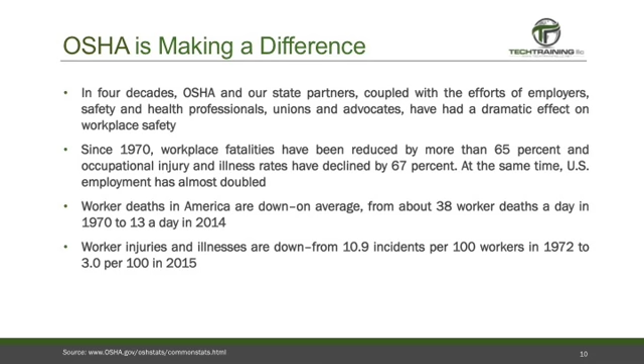Worker deaths in America are down on average from about 38 workers per day in 1970 to 13 per day in the year 2014, and worker injury and illnesses are down from 10.9 incidents per 100 workers in 1972 to 3 per 100 in the year 2015. These numbers are positive, but they're nothing to brag about. One death, one injury, one illness is far too many.

So who is covered by OSHA? Most employees in the United States come under OSHA's jurisdiction. OSHA covers private sector employees and employees in all 50 states and the District of Columbia, and other U.S. jurisdiction territories, directly through the federal OSHA program or through an OSHA-approved state program. State-run health and safety programs must be at least as effective as the federal OSHA program to qualify.

Now, employees who work for state and local governments are not covered by federal OSHA, but do have Occupational Safety and Health Act protection if they work in a state that has an OSHA-approved state program. 4 additional states and 1 U.S. territory have OSHA-approved programs that cover public sector employees only. This includes Connecticut, Illinois, New Jersey, New York, and the Virgin Islands. Private sector workers in these 4 states and the Virgin Islands are covered by federal OSHA.

And federal agencies must have a safety and health program that meets the same standards as private employers. Although OSHA does not fine federal agencies, it does monitor federal agencies and responds to workers' complaints. The United States Postal Service is covered by OSHA. And now is a good time to mention the General Duty Clause. The General Duty Clause is written into the Occupational Safety and Health Act.

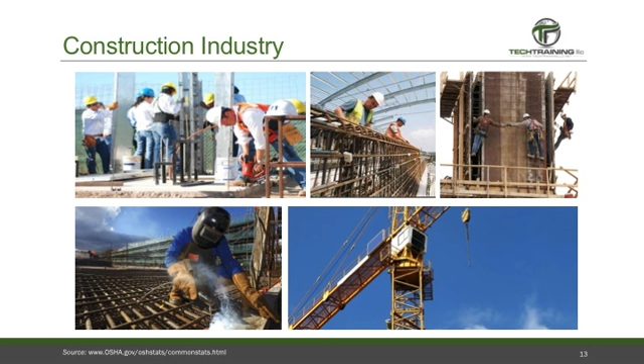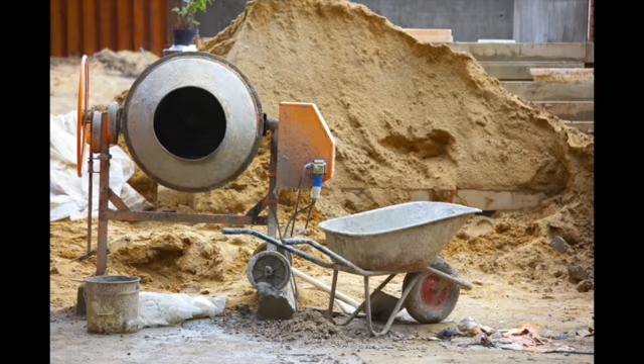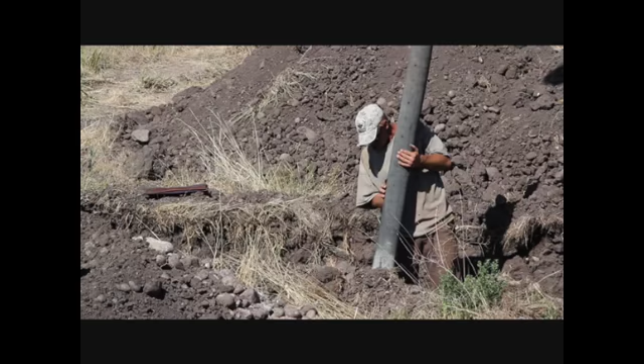Construction is a high-hazard industry that comprises a wide range of activities. It may involve demolition, alterations, renovations, and repair. Most people in this industry are in the industry because they have a passion for it. They're professionals and understand the hazards that they face every day. Many of those hazards they can see. They understand the potential for falls, the potential of unguarded equipment or being struck by heavy construction equipment. Unfortunately, many of those hazards are not visible, such things as silica dust or asbestos.

The information and the resources provided in this presentation are hopefully going to assist those in this industry, whether they be workers or employers, to identify and reduce and hopefully eliminate construction-related hazards. And there is no better place to start than with the construction industry's Fatal Four. Of the 4,386 worker fatalities in private industry in the calendar year of 2014, 899 or 20.5% were in construction. The Fatal Four were responsible for more than half, or 60.6%, of the construction worker deaths in the calendar year of 2014.

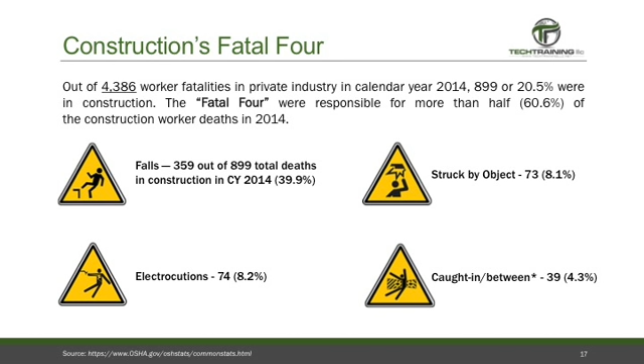And number one on the Fatal Four list, falls. 359 of the 899 total deaths in the calendar year 2014 were caused by falls. That's 359 of our fellow workers perished from this one hazard. Next up, electrocutions. 74 people killed by electrocutions. After that, struck by an object, 73 people. And last, caught in between, 39 fellow workers killed by this hazard. Just imagine if we could eliminate these 4 accidents. That would be 545 people returning home to their families at the end of every day, every year.

So now let's review what OSHA has found to be 2015's top 10 most frequently cited violations. Not surprisingly, number 1 is fall protection, obviously directly related to the Fatal Four. The C at the end of fall protection represents that this is a specific construction standard. Number 2, hazard communication, getting the message out. A big problem on the construction site and in the construction industry. Number 3, also a construction standard, scaffolding. Number 4, respiratory protection. This is especially important when we're talking about silica dust. Respiratory protection protects you from unseen hazards.

Number 5, lockout/tagout. Number 6, powered industrial trucks, obviously associated to being struck by, another one of the Fatal Four. Ladders, a construction standard. Also, electrical wiring. Number 9, machine guarding. And number 10, electrical. Here we're talking about general electrical requirements.

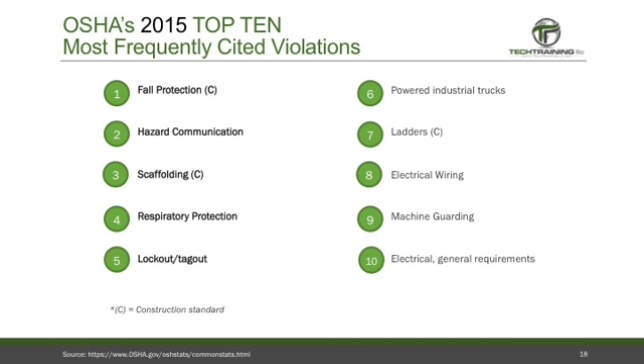Now we've already discussed that OSHA is the law, but let's take a look at the breakdown of these violations. And let's start with number 10, electrical. Again, general requirements. This is OSHA standard 1910.303. Total violations for the fiscal year 2015 was 2,181. Some of the top sections that were cited was installation and use of equipment. Also, not surprisingly, the space around electrical equipment. This can be identified as a hazard on almost any job site that you visit. The previous year, the fiscal year 2014, the ranking for this violation was also number 10 with 2,427 cited violations.

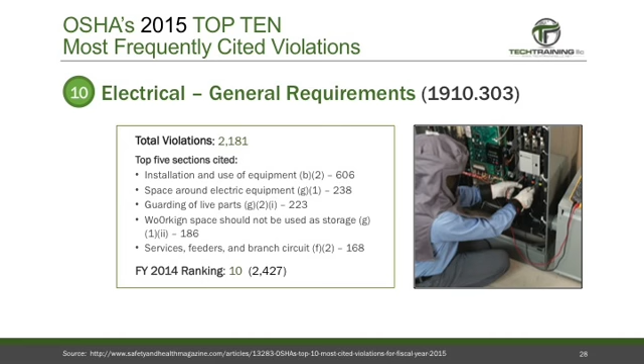Next up, number 9, machine guarding, OSHA standard 1910.212. Total violations for 2015 was 2,540. Not surprisingly, one of the top violations was types of guarding. It is highly recommended that you stick with manufacturer recommended guarding. If you question that guarding, you can always ask the manufacturer if this guarding is OSHA approved. If it is, then stick with that guarding and you can avoid this violation. This is the same ranking as 2014. It was number 9, and again, slightly more violations in 2015 than 2014, as 2014 had 2,520 violations.

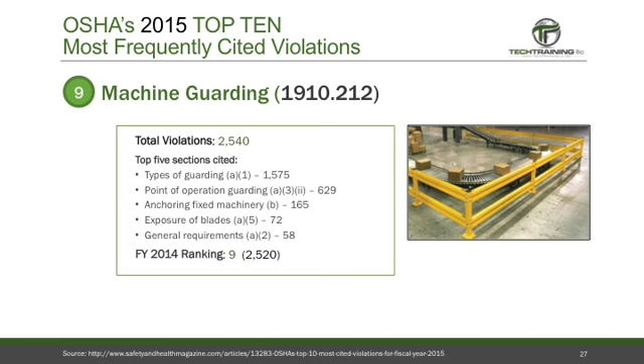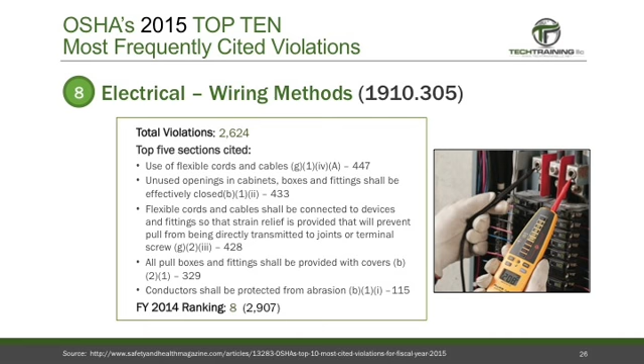Number 8, electrical again. This is wiring methods, 1910.305. Total violations for the year 2015 was 2,624. Of the top cited violations, use of flexible cords and cables. This is category G1-4A. 447 violations. This one is becoming more and more common as people are using incorrect types of cords and cables. Be sure to verify that you're using the correct cable. In fiscal year 2014, its ranking was also number 8, but it had 2,907 violations, so 2015 saw a decrease of almost 300 violations, an overall improvement in the year 2015.

Number 7, ladders. OSHA standard 1926.1053. Total violations for 2015, 2,732. And number 1 cited violation in this category, requirements for the ladder. This is accessing upper landing surfaces. This is a short climb, and what people do is they'll grab a pallet, they'll grab a plank, they'll grab something along those lines and use it as their ladder.

This was cited 1,866 times. The 2014 ranking for this category was number 7, so no change. But again, the positive side, a slight decrease. In 2014, there were 2,967 violations, again compared to the 2,732 of 2015.

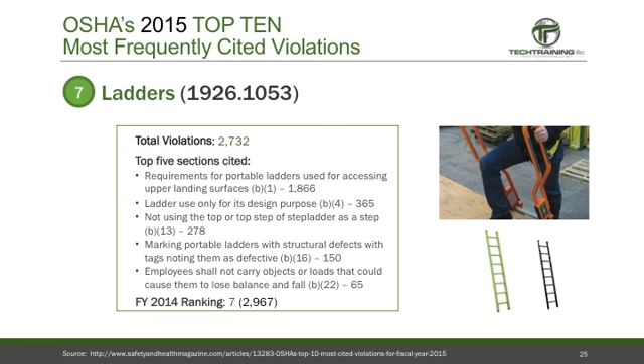Number 6, powered industrial trucks, 1910.178. Total violations, 3,004. Over 3,000 violations, and the number 1 violation, ensuring competency of the powered industrial truck operator. Now you may recall that one of the fatal 4 was struck by, and here this violation was cited 544 times. Incompetent powered industrial truck operators cited in the year 2015. That's a scary number considering the fatal 4.

The 2014 ranking was number 5, so it's dropped back a bit. I suppose that's a positive sign, and the number of violations has dropped a bit from 3,147 in 2014. But again, these are directly related to the fatal 4 and have to be corrected.

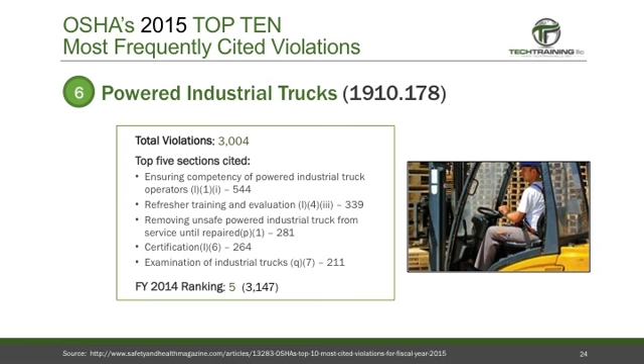Next, lockout tagout, 1910.147. This was number 5 on the 2015 list. This standard outlines minimum performance requirements for the control of hazardous energy during servicing and maintenance of machines and equipment. Total violations for the year 2015, 3,308. This is an increase from 2014, where there were 3,117 violations. Furthermore, this violation has moved up in the rankings, number 6 in 2014, moving in the wrong direction at number 5 for 2015.

Next is number 4, respiratory protection, standard 1910.134. This standard directs employers on how to establish and maintain a respiratory protection program. It lists requirements for program administration, worksite specific procedures, respirator selection, employee training, fit testing, medical evaluation, and respirator use. It also covers maintenance and repair of respirators.

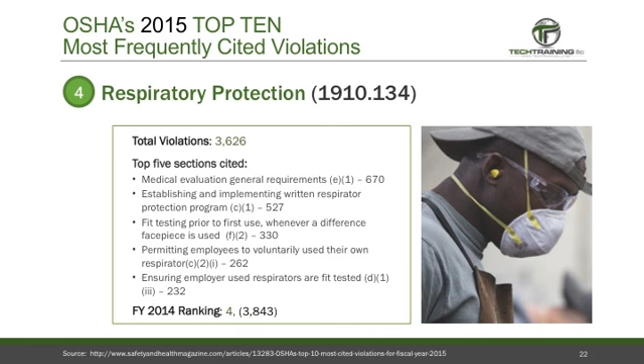OSHA cited this standard in the year 2015 3,626 times. This again is a slight decrease, a slight improvement over the year 2014, where it was cited 3,843 times.

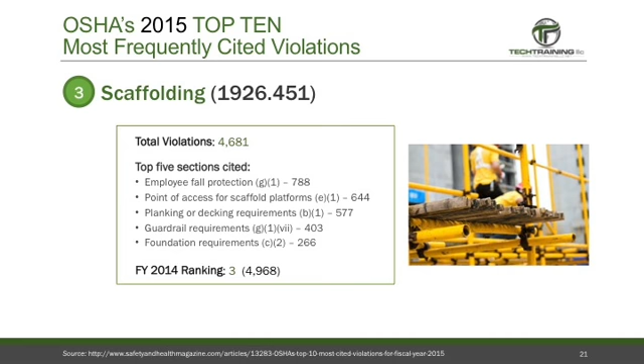Number 3, scaffolding, standard 1926.451. Total violations in 2015, 4,681. And take a look at the number 1 issue in this sector. It was employee fall protection, cited the most times at 788. And again, I want to remind you the number 1 in the fatal 4 was in fact falls. This is a slight improvement over 2014, where the ranking still remained number 3, but was cited 4,968 times.

Number 2 is hazard communications, 1910.1200. This standard addresses chemical hazards produced in the workplace and imported into the workplace. It also governs the communication of those hazards to workers. This particular violation was cited 5,681 times in the year 2015. Its ranking in 2014 was in fact number 2, when it was cited 6,148 times. Again, a slight improvement over 2014.

And number one cited in the year 2015 again was Fall Protection, 1926.501. This is also the number one in the fatal 4, falls. This standard outlines when fall protection is required, which systems are appropriate for given situations. It also covers the proper construction and the installation of the safety systems, and the proper supervision of employees to prevent falls. It is designed to protect employees on walking or working surfaces, horizontal or vertical, with an unprotected side or edge higher than just 6 feet.

According to OSHA's top 10 most frequently cited violations of 2015, again, this was the number one ranking, fall protection, cited 7,402 times, and unfortunately, it was also number one in 2014, being cited 7,516 times.

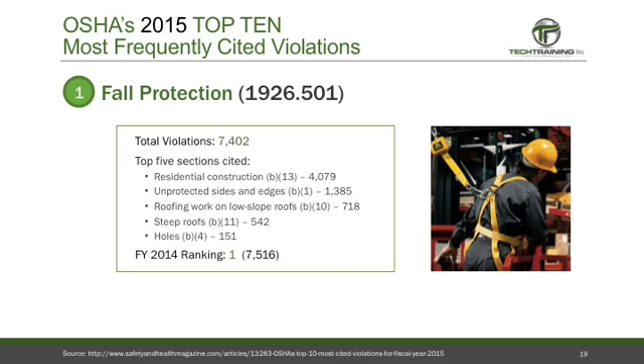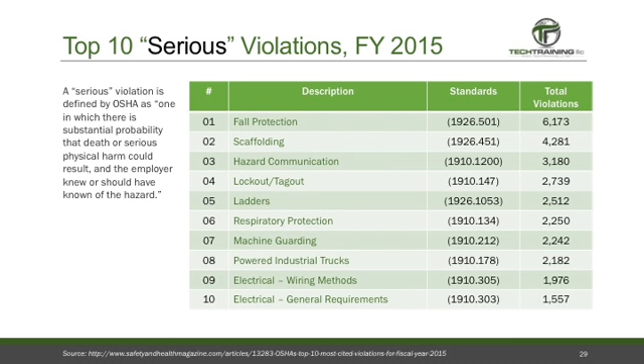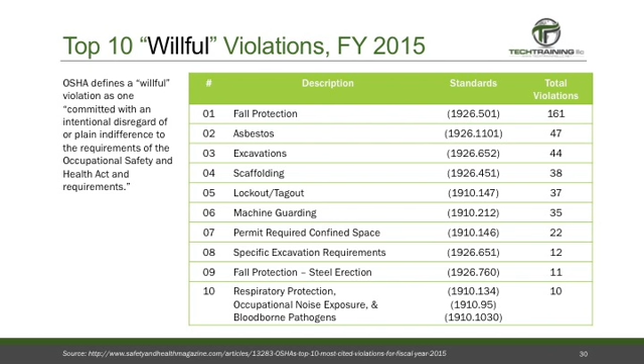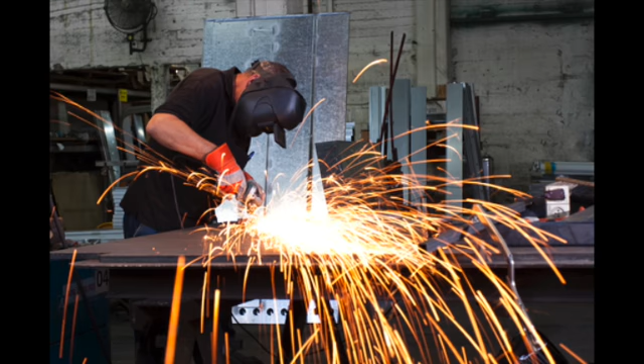Now here's a sad reality. Hazards exist on every construction site in many different forms. Sharp edges, falling objects, flying sparks, chemicals, noise, and a host of other potentially dangerous situations. OSHA requires that employers protect their employees from workplace hazards that can cause injury. Controlling a hazard at its source is the best way to protect the employees.

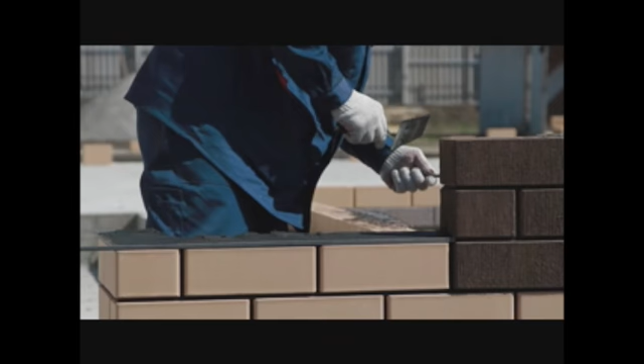Depending upon the situation and the workplace conditions, OSHA recommends the use of engineering or work practice controls to manage or eliminate hazards to the greatest extent possible. For example, building a barrier between the hazard and the employee is an example of an engineering control. Changing the way in which employees perform their work is a work practice control.

When engineering or work practice controls and administrative controls are not feasible or do not provide sufficient protection, employers must provide employees with personal protective equipment or PPE. Personal protective equipment is equipment worn to minimize the exposure to a variety of hazards. These injuries and illnesses may result from coming in contact with chemical, biological, physical, electrical, mechanical, or other workplace hazards.

Personal protective equipment may include items such as gloves, safety glasses, and safety shoes, earplugs or ear muffs, hard hats, respirators, coveralls, vests, and in some cases, full body suits. So what can be done to help ensure the proper use of personal protective equipment? Well, all personal protective equipment should be of safe design and construction, and should be maintained in a clean and reliable fashion. It should fit well and be comfortable to wear. This will encourage workers to use it.

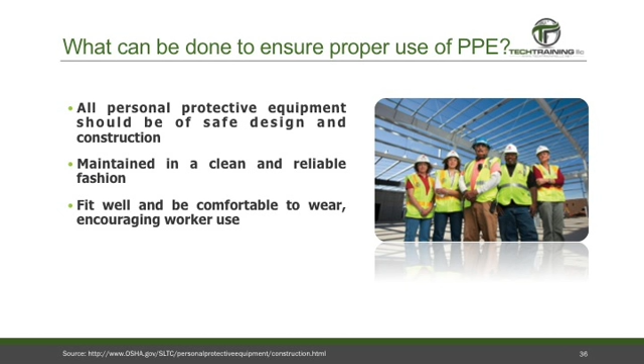Employers must also require and train each worker for the following. When is it necessary to wear personal protective equipment? What kind of PPE is required? The limitations of the PPE, the proper care, maintenance, and the useful life, as well as the disposal of the personal protective equipment. Now, whether you are an employee or an employer, you should be interested in some of the general safety and health provisions involved with personal protective equipment. This falls under

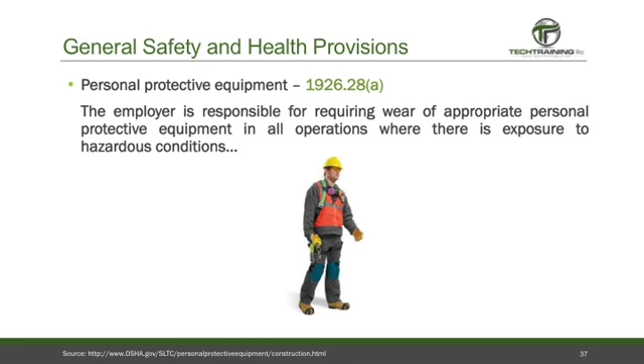1926.28. The employer is responsible for requiring wear of all appropriate personal protective equipment in operations where there is exposure to hazardous conditions. 1926.28(b). Regulations governing the use, selection, and maintenance of personal protective equipment and life-saving equipment are described under Subpart E of this section. 1926.95(a). Protective equipment including PPE for eyes, face, head, extremities, etc. shall be provided, used, and maintained in a sanitary and reliable condition.

Now we realize that some of these regulations are extremely dull, but this next one is important as we've seen many arguments erupt between workers and supervisors on various construction sites. And it is related to employee-owned personal protective equipment, and it is in OSHA under 1926.95 Part B. And it states, where employees provide their own personal protective equipment, the employer shall be responsible to assure its adequacy, including proper maintenance and sanitation of such equipment. 1926.95 Part C is design, and design states that all personal protective equipment shall be of safe design and construction for the work which is to be performed.

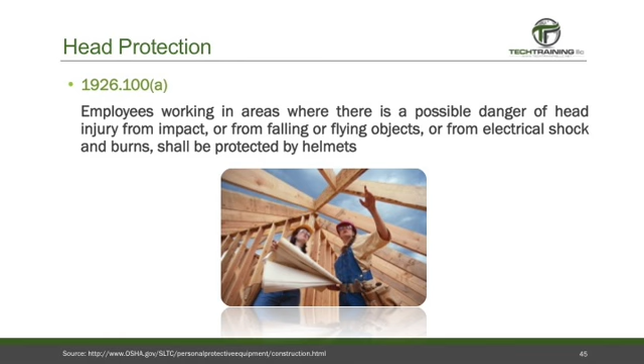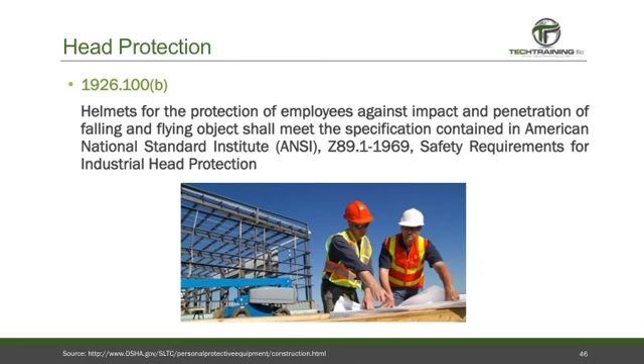And those helmets must meet some specifications, and they fall under 1926.100 Part B. Helmets for protection of employees against impact and penetration of falling or flying objects shall meet the specifications contained in American National Standards Institute ANSI Z89.1-1969, Safety Requirements for Industrial Head Protection. And if you are in an occupation which exposes you to high voltage electrical shock, then the specification is slightly different. Here, the head protection must meet specifications contained in American National Standards Institute Z89.2-1971.

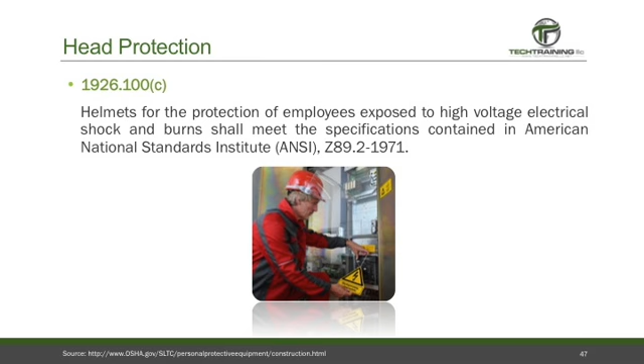Next up is 1926.101, hearing protection. Wherever it is not feasible to reduce the noise levels or duration of exposure to those specified in Table D-2, permissible noise exposures, in 1926.52, ear protection devices shall be provided and used.

Now, when ear protection devices are inserted into the ear, they shall be fitted and determined individually by competent persons. And this is a good time to mention that stuffing cotton into someone's ears is not acceptable hearing protection.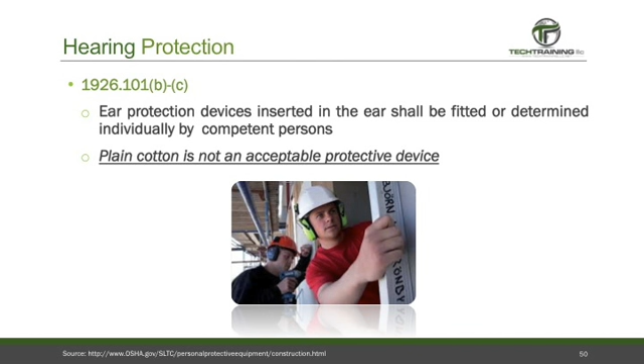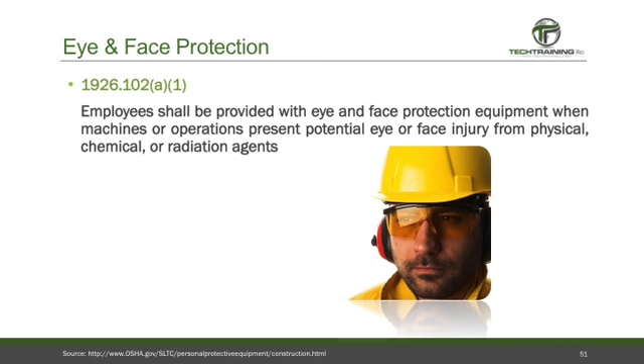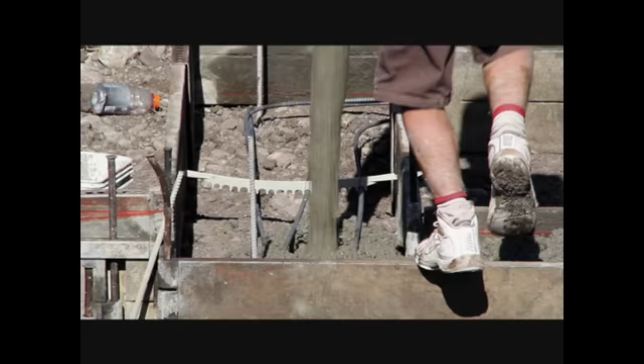Eye and face protection, 1926.102. Employees shall be provided with eye and face protection equipment when machines or operations present potential eye or face injuries from physical, chemical, or radiation agents. Safety glasses or face shields are worn any time that work operations can cause foreign objects to get into the eye. For example, during welding, cutting, grinding, nailing, or when working with concrete or harmful chemicals.

Eye and face protection should also be worn whenever there's going to be exposure to any electrical hazards, including working on energized electrical systems. Eye and face protection should be selected based on the anticipated hazards. Eye and face protection equipment required by 1926.102 shall meet the requirements specified in the American National Standards Institute's Z87.1-1968, Practice for Occupational and Educational Eye and Face Protection.

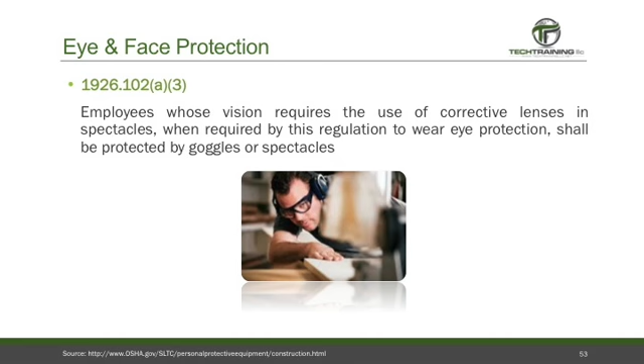Employees whose vision requires the use of corrective lenses in spectacles, when required by this regulation to wear eye protection, shall be protected by goggles or spectacles. When wearing goggles or spectacles, they must meet the following specifications. The spectacles must have protective lenses which provide the optical correction.

The goggles that are going to be worn with the corrective spectacles must be worn without disturbing or adjusting the spectacles. And lastly, if the goggles are going to have corrective lenses, the corrective lenses must be incorporated and mounted behind the protective lenses.

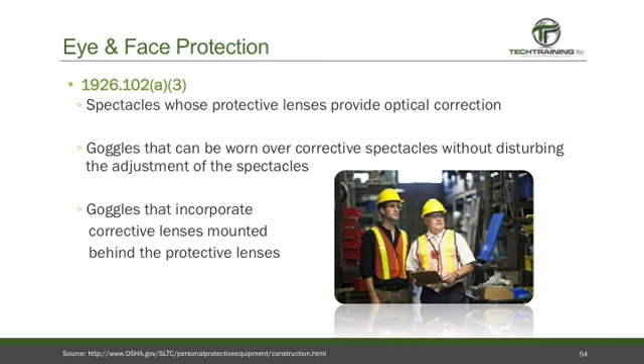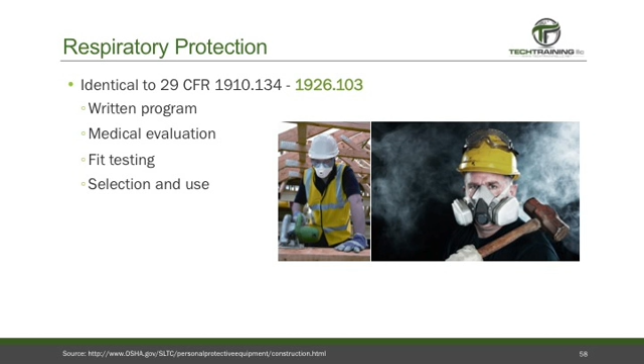Respiratory disease is the silent killer of the construction industry, and therefore respiratory protection is taken very seriously. Respiratory protection falls under OSHA 1926.103 but is identical to the Code of Federal Regulations 1910.134. When respiratory protection is required, it must come with a written program, medical evaluations, fit testing, selection and use of respirator, maintenance and care, training, program evaluation, and record keeping.

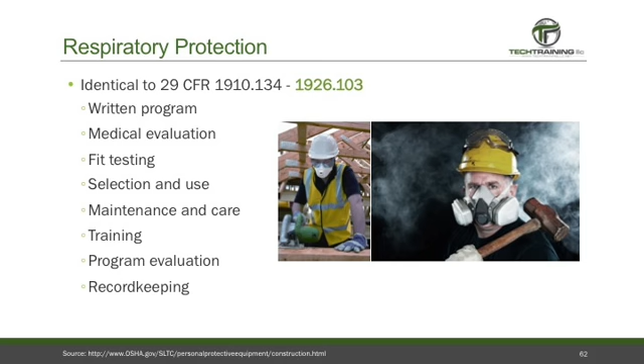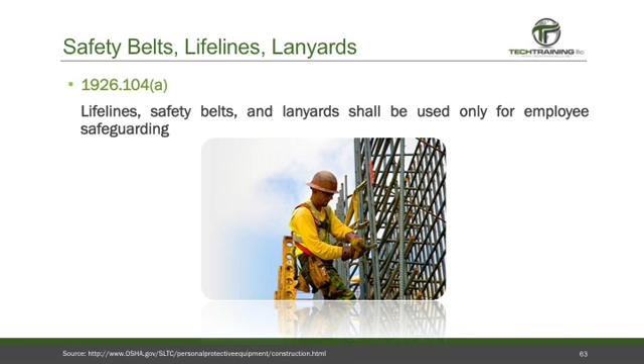Next is 1926.104, safety belts, lifelines, and lanyards. Lifelines, safety belts, and lanyards shall be used only for employee safeguarding. Lifelines shall be secured above the point of operation to an anchorage or structural member capable of supporting a minimum dead weight load of 5,400 pounds.

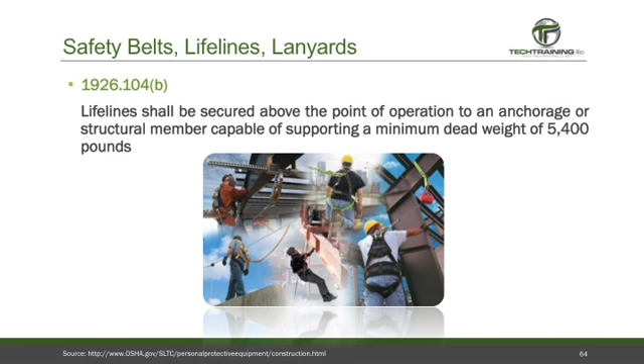Lifelines used on rock scaling operations or in areas where the lifeline may be subject to abrasion or cutting shall be a minimum of 7/8 of an inch wire core manila rope. For all other lifeline applications, a minimum of 3/4 of an inch manila or equivalent with a minimum breaking strength of 5,400 pounds shall be used.

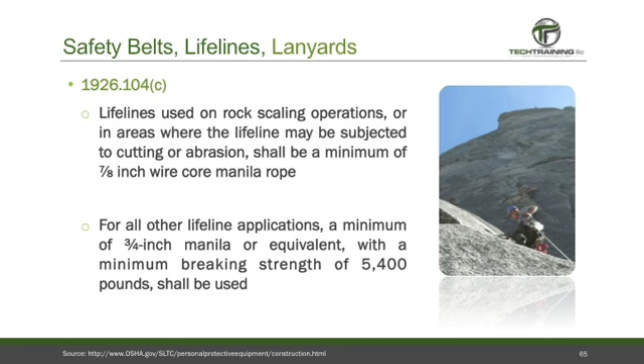Safety belt lanyards shall be a minimum of 1/2 inch nylon or equivalent with a maximum length to provide for a fall of no greater than 6 feet. Furthermore, the rope shall have a nominal breaking strength of 5,400 pounds.

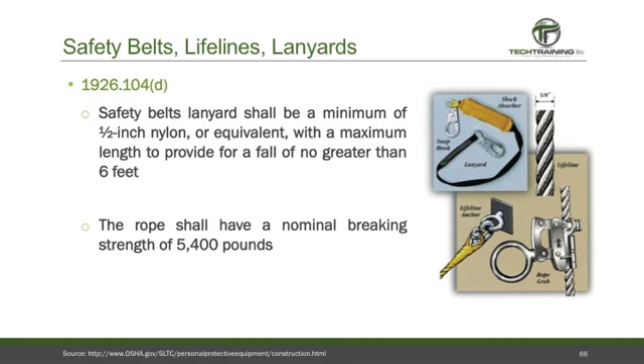All safety belt and lanyard hardware shall be drop forged or pressed steel in accordance with Type 1 Class B plating, specified in the Federal Specifications QQ-P-416. All safety belt and lanyard hardware, except rivets, shall be capable of withstanding a tensile loading of 4,000 pounds without cracking, breaking, or taking a permanent deformation.

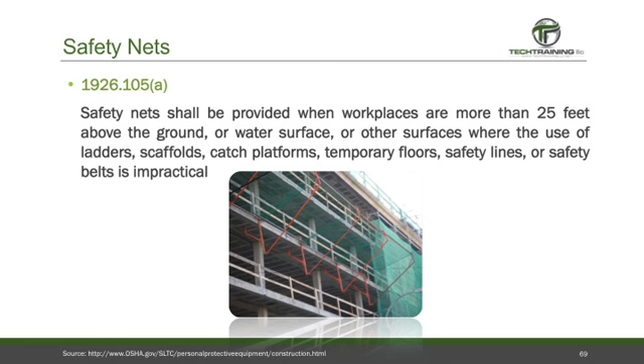Safety nets shall be provided when workplaces are more than 25 feet above the ground or water surfaces, or other surfaces where the use of scaffolds, catch platforms, temporary floors, safety lines, or safety belts are simply impractical. When safety nets are required, operations shall not be undertaken until the net is in place and has been tested.

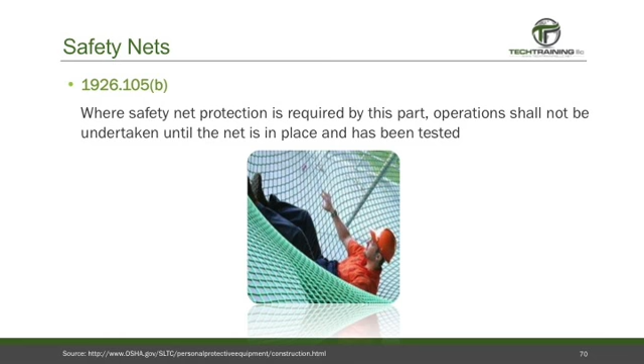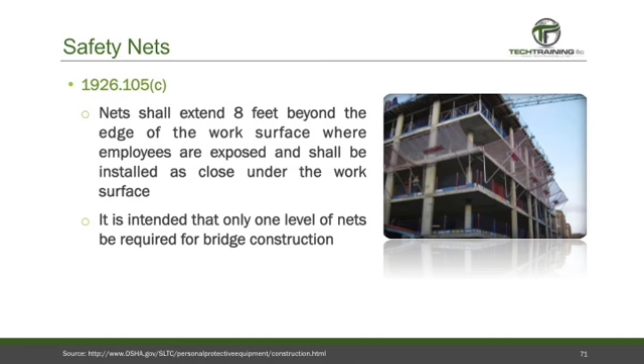Nets shall extend 8 feet beyond the edge of the working surface, where employees are exposed, and shall be installed as close under the work surface as possible. It is intended that only one level of nets be required for bridge construction. All nets shall meet a performance standard of 17,500 foot-pounds minimum impact resistance as determined and certified by the manufacturers, and shall bear a label of proof test.

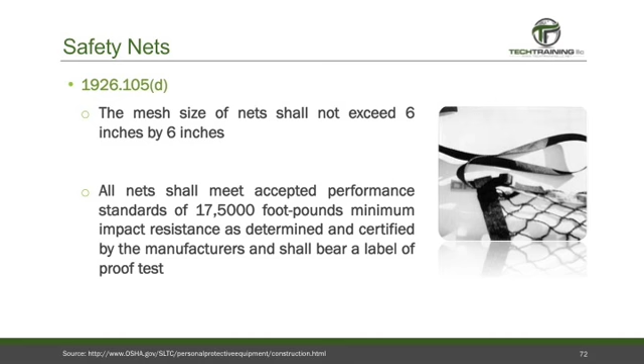Forged steel safety hooks and shackles shall be used to fasten the net to its supports. Also, connections between net panels shall develop the full strength of the net.

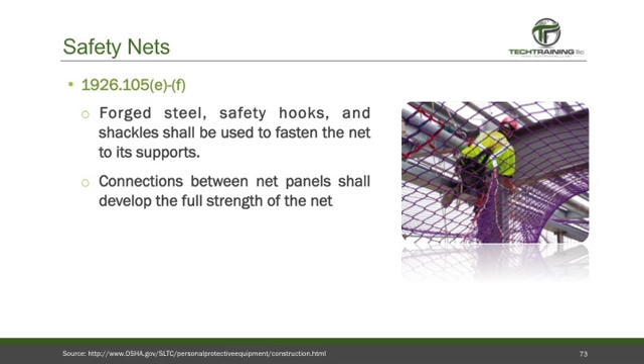Working over or near the water is 1926.106, and it states that life jackets or buoyant work vests must be approved by the United States Coast Guard. Also, prior to and after each use, the buoyant work vests or the life preservers shall be inspected for defects. Ring buoys shall be provided for rescue, and also a life-saving skiff shall be immediately available.

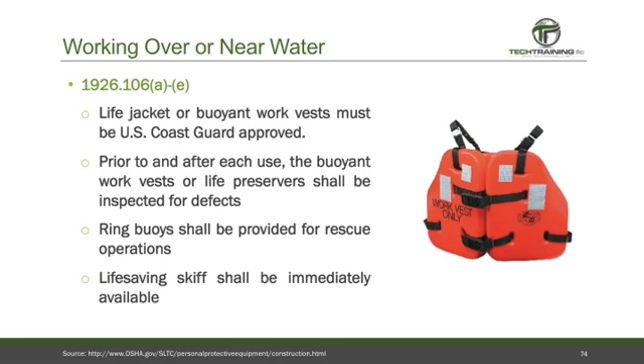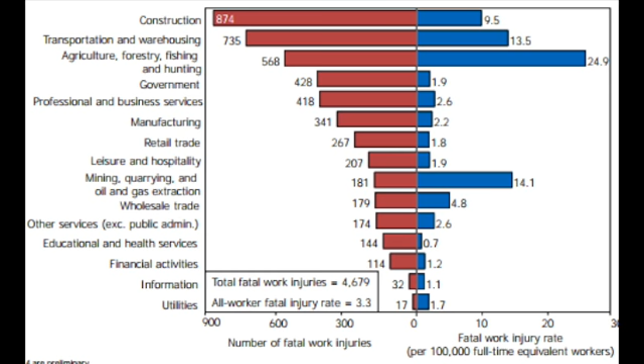Construction fatalities rose to 874 in 2014, up from 828 in 2013. The number of fatal injuries in construction in 2014 was the highest reported total since 2008. The fatal injury rate for workers in the private construction industry was 9.5 per 100,000 full-time equivalent workers in 2014 and 9.7 per 100,000 full-time equivalent workers in 2013. Heavy and civil engineering construction recorded a series low of 138 fatal injuries in the year 2014, down from 165 in 2013.

Now, there is no question that starting a job site safety program is difficult. There are those who believe that it is all about compliance. There's those who believe it's all about saving money. There's even workers who believe that safety programs are designed to simply get rid of people on the job site that the supervisor doesn't like. Now, in some very rare cases, this may be true. But let's take a look at why you should be interested in a job site safety program. And let's start with the difference between an accident and an incident.

Accidents are unexpected, unplanned, and uncontrollable. Now, many people say this simply isn't true. Accidents are controllable. They are not controllable. They are preventable, but they are not controllable. Once they begin, they take on a life of their own. Accidents can cause physical injury, property damage, and equipment loss.

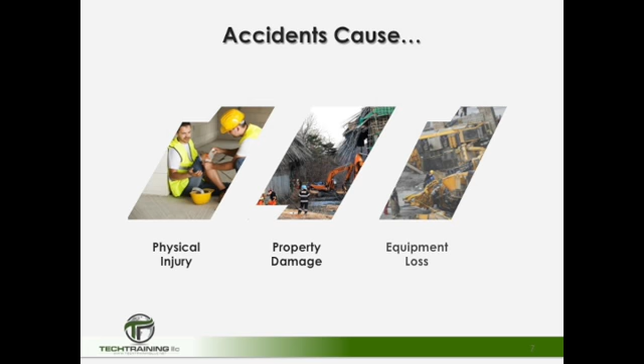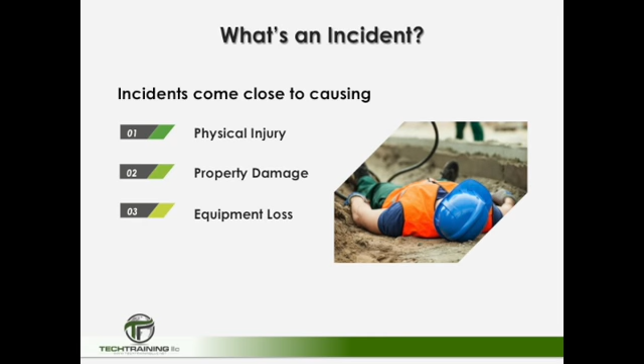Now, an incident can come close to causing physical injury, property damage, or equipment loss. And many people say, well, isn't that the same thing? Well, it is, except incidents go unreported, and incidents are the key to preventing accidents. If we address incidents before they cause loss or injury, we're going to take a big step forward in preventing accidents.

The interaction between workers, equipment, management, and machines are complex enough. But even more complexity is added in when all of these things come together to form the workplace. Now, those in the construction industry may be used to this type of complexity, but now add in the unexpected problems that you may be bringing from home. Perhaps you're preoccupied with a sick family member, or maybe even an old friend. And what about peer pressure on the job site? Or perhaps you got an unexpected bill. And when all of these things come together on the job site, we have an accident.

So what can be done? We've already discussed the history of OSHA, but what about some of the other benefits of OSHA? First, the company is going to receive lower industrial insurance costs. The more you comply with OSHA, the fewer compliance inspections there are. A safer job site means reduced litigation, reduced legal fees, and less settlements. And finally, there are going to be significantly lower indirect costs for the company, which means more profit and more money for the workers.

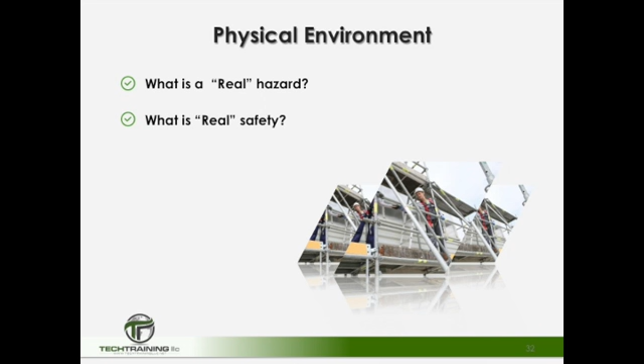Now in the section on physical environment, we're going to be talking about how to identify actual hazards. On the construction site, there are many potential hazards. Some are visible and some are not visible. But the question becomes, what is a real hazard and what is a perceived hazard? Also, what is true safety and what is perceived as safety? And lastly, we have to ask, can something so little cause any serious injury? Well, we're going to find out.

Now earlier in this presentation we discussed the statistics of injuries in the construction industry, and those statistics are not pretty. Construction continues to be number one or number two for deaths in the workplace. With this in mind, let's move forward with one focus and one clearly stated goal: that no one ever gets hurt.

Now, just a few minutes ago, we said that starting a safety program was difficult because there's those who believe it's all about compliance, others who believe it's all about money, and workers who believe that safety is nothing more than a management tool. But this simple statement removes all politics. It removes all company grievances. It removes all worker grievances and focuses on one single goal: that no one ever gets hurt.

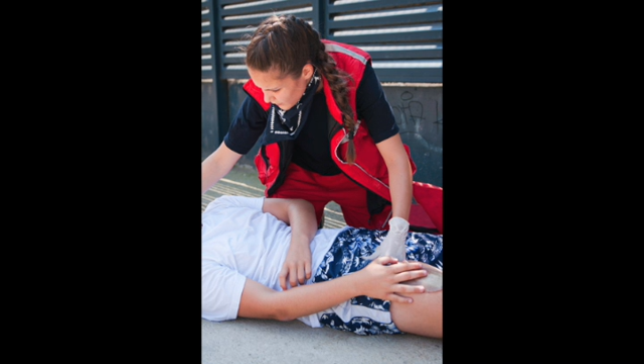All too often, an accident occurs on the construction site, and it's reported, recorded, and hopefully corrected. But then most of us move on with our lives. But for the injured person and their family, they have to continue to live with that injury every day. In many cases, they have to become overnight attorneys just to find out what benefits they're entitled to. Or they have to learn new skills and new training just to continue on with their lives.

Now, to reach this goal, we must build, for lack of a better expression, a solid foundation. The mere fact that you're watching this video now some 45 minutes into the video suggests that you do want to make a change on the job site. Now the reality is that every work site and every worker is slightly different, which makes many hazards unique.

Therefore, what we hope to accomplish here is to give you the tools that are going to develop a safe environment. Hopefully you can gain cooperation and encourage the sharing of ideas and a call for new ideas. Furthermore, we hope to encourage safe behavior on every job site, and hopefully you'll be able to build and establish safety systems that work for you and your coworkers.

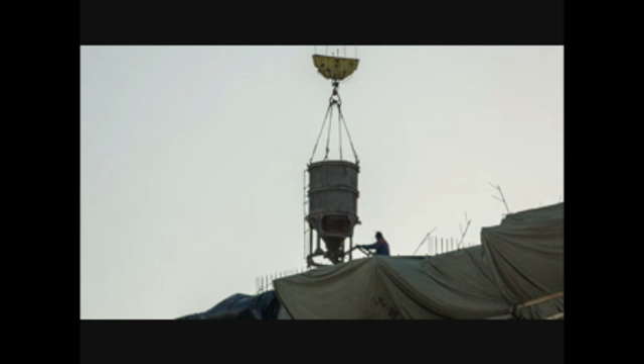So let's go ahead and get started with helping ourselves and others. We're going to begin by focusing on the physical environment in which we work. Now, as we said, every construction site is unique, which means that every hazard is unique as well. So here we're going to be focusing on three main areas: being aware of hazardous environments, avoiding hazardous activities, and finally wearing our personal protective equipment.

And let's start here in the job trailer. So often when it comes time for construction safety, many people want to run onto the job site and point fingers at the workers. But what about the example that's being set right inside the job trailer? Many times, the very people responsible for safety hardly represent a safe environment.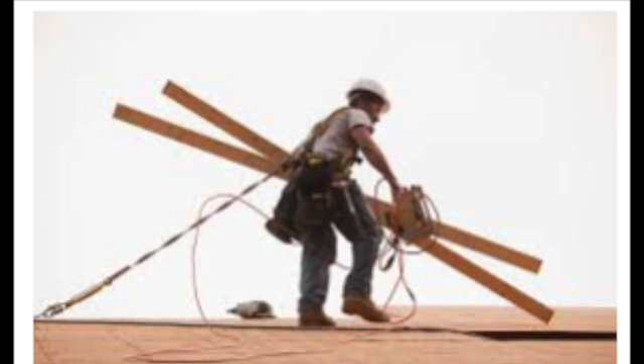This is what we refer to as the pyramid of hazard identification. And sometimes to identify a hazard, we must use a little imagination. So let's assume that we have a little bit of soap on the floor. Is this a hazard? Well, of course. But let's imagine what exactly could possibly happen from a little soap on the floor. Could someone slip on the soap and then not report it, or not clean it up themselves? If so, this is an incident. Remember, an incident is close to an accident, but it goes unreported and uncorrected. So could this happen? Absolutely.

Now, since the soap wasn't cleaned up, could a person slip on the soap and hurt their back? And it's just a minor injury, so they go on back to work and continue to work throughout the day, and eventually the pain goes away because it was a minor fall. But could somebody slip and break an arm? Absolutely. And now we have a lost time accident with an employee in severe pain and an employee who is going to have to make adjustments in their life to compensate for that broken arm. All because the soap wasn't cleaned up.

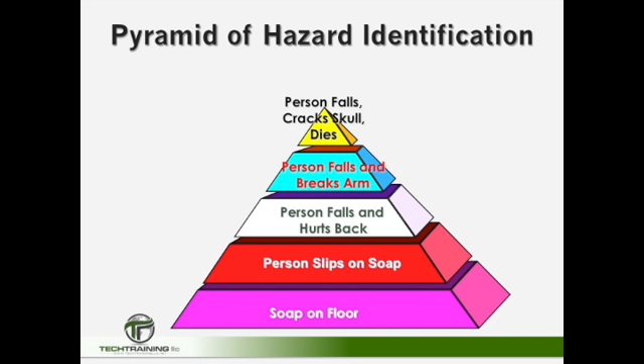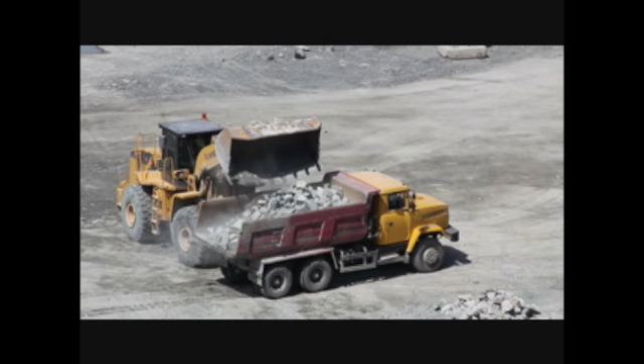And even worse, could that little bit of soap on the floor result in a death? Unfortunately, the answer is yes. And all of this could have been avoided had someone just taken a moment to clean up the soap. If they didn't have the available equipment to clean up the soap, they could have marked off the area so that nobody else would slip on the soap until they can notify the proper people to come over and clean up the soap. Now, if a little soap on the floor can cause such injury, just imagine how many things we probably pass by on the job site every day that could be corrected.

Now that we have a basic understanding of hazard awareness, let's take a look at avoiding dangerous activities. Now, though it's easy to say avoid dangerous activities on the job site, it's much easier said than done. We have dangerous activities going on around us every day on a regular basis. But there are precautions and steps that we can take to minimize the dangers and to protect ourselves and others.

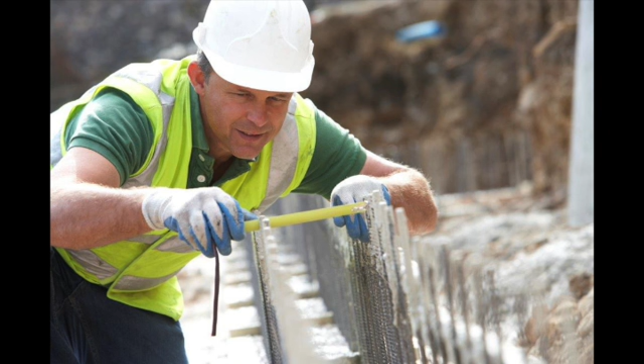Now, if you don't know the PPE requirements for a particular task, ask a supervisor. A good supervisor will know the PPE requirements for every task, and if they don't, they will at least know where to go to get the answer. So don't forget your personal protective equipment. And at a minimum, every job site should be equipped with at least the basics: hard hats, vests, glasses, dust masks, hearing protection, and gloves.

Next, let's take a look at our attitudes towards safety. And let's begin with agreeing that safety is indeed everyone's responsibility. Remember our pyramid? Well, had the first person who saw that soap stopped and cleaned it up, we never would have moved up the pyramid. Now granted, some people may not have realized how big of a hazard a little bit of soap can be, but there were others who thought, "Not my job, why should I bother?" and moved on. This is a bad attitude.

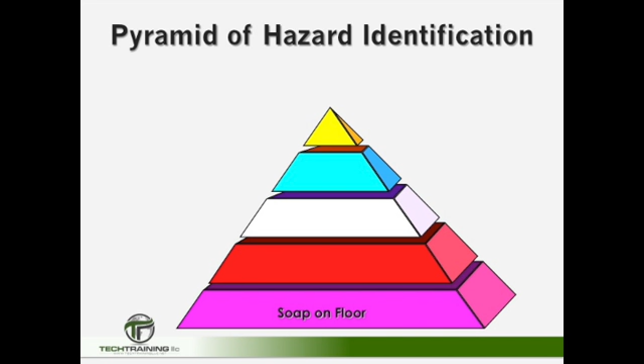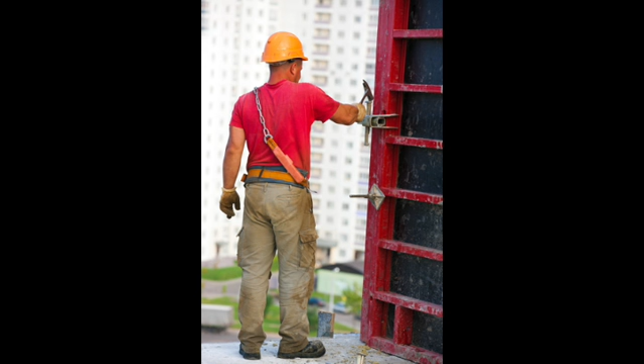And where does that bad attitude come from? If you're in construction, you're probably familiar with the pink hard hat punishment. This is when a worker forgets to bring their hard hat to the job site and they're forced to wear a pink hard hat all day long. And though it may be funny and it may be cute, what is that worker's attitude going to be towards safety? Positive or negative? The message that was just sent to that worker, as well as to all of the other workers on the job site, is that the supervisor could care less about their personal safety, and instead what they're concerned about is compliance.

Now, we're not saying that compliance isn't important. It is. There are a number of construction companies that get huge fines from OSHA and other regulatory agencies. But compliance is far more easily achieved on a construction site that is filled with employees who have positive attitudes towards safety. Just imagine the difference had that supervisor called in the employee who forgot their hard hat and said, "Hey, Bill, here's a hard hat, regular color, but don't forget yours tomorrow. I don't want to see you get hurt, and I don't want to be the one that has to tell your family you were hurt."

Now, with the soap on the floor scenario and the hard hat scenario still fresh in our mind, what do you suppose it is that this guy could do as he walks through this construction site? Take a look and see if you can identify how many little items he could clean up pretty quickly and pretty easily that are in fact safety hazards.

Well, one obvious hazard here is that this gentleman is not wearing a hard hat. But there's also these masonry blocks that could be stacked, and that hose could be wrapped up more properly. Furthermore, the fire extinguisher isn't hung, and experience tells us that once an extinguisher comes down off the hook, it just moves further and further away from where it's supposed to be. So when a fire does occur, nobody can find the fire extinguisher.

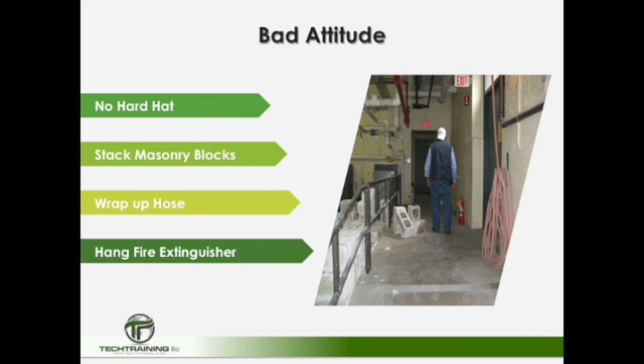And how long would it take to clean this up? How long would it take to have a safer work environment? 2 minutes? Maybe 3? The right attitude can produce a better, safer work environment.

One of the most effective tools that can be implemented into any safety program is peer keeping. As the old saying goes, 2 heads are better than 1. Peer keeping should be implemented whenever you feel that somebody is doing something unsafe. This isn't just for supervisors, but also for coworkers, friends, and visitors to the site. The peer keeping process is meant to be simple, and therefore it is a simple 4-step process.

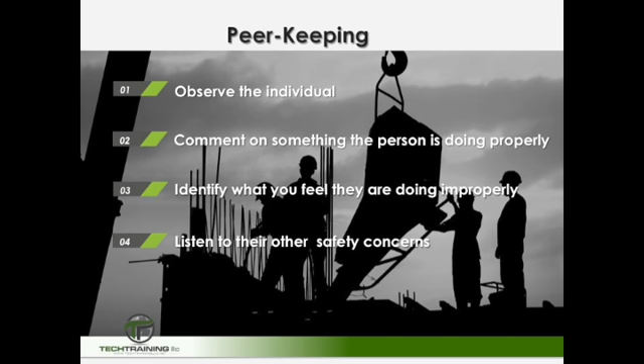So let's go ahead and give this a shot. Remember our buddy who was lugging all the wood? Well, after observing him for a moment, we can see that clearly he's struggling and clearly this is unsafe. So you might start off by saying, "Hey, it's obvious you're a hard worker and you're a safe worker, you're wearing your hard hat. But is there a better way to lug this wood from point A to point B?" If they say no, then offer a better way or offer to lend a hand.

And lastly, if they want to discuss some other safety issue or even discuss this safety issue further, then stay and listen, offer recommendations or potential changes to make the job safer. You never know what reaction you might get. Okay, this reaction might be a bit of an exaggeration, but you have a much better chance of this person reacting positively as opposed to negatively.

Next, remember our supervisor with the disastrous office? All of the hazards that we identified here? There was the poorly stored chemicals, the overloaded electrical outlets, and the tripping hazards. What could you do here using peer keeping? And remember, you're probably talking to the supervisor, perhaps even your supervisor.

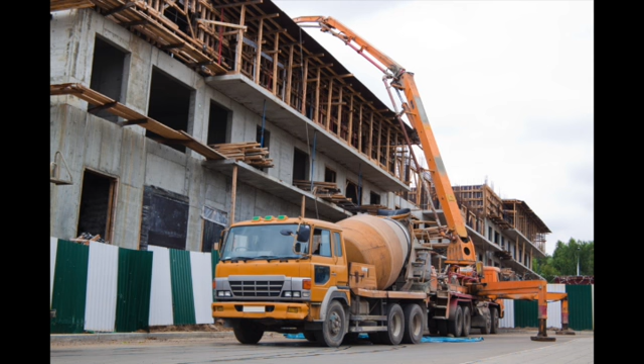Next, your safety system should always promote new ideas because the job site is also constantly changing. The conditions in which construction takes place change daily and in many cases change without predictability. Never squash an idea or crush somebody's thoughts. If you do, chances are you'll never get another new idea. And lastly, promote these ideas because you never know who might have one.

As part of your safety system, always discourage unsafe acts and unsafe behaviors. This lets everyone know on the job site that you're serious about safety and they are more comfortable to discuss it and point out unsafe acts and conditions. In conclusion, remember, if you see a safety hazard and you cannot correct it, then you can report it. In the meantime, place a warning sign or some other type of barricade around the unsafe area. This lets everyone know that there's a potential hazard. And never ignore an unsafe act, behavior, or condition.

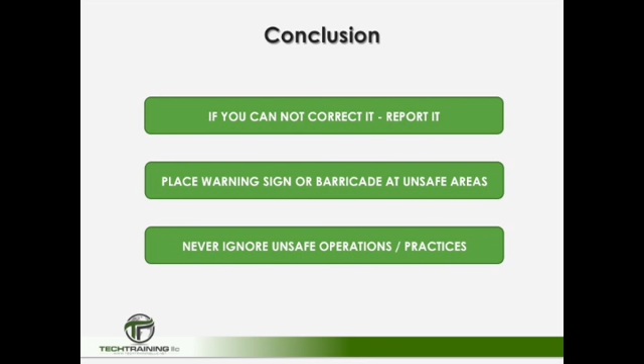Ladies and gentlemen, a sad and unfortunate update. While making this video, the Bureau of Labor Statistics released their 2015 fatality rates in the construction industry. I personally hate referring to these people as rates, as statistics, or as numbers. Every one of them was a coworker, a friend, a mother or a father, a son or a daughter, a brother or a sister. And the sad news is this, that in 2015, construction job site deaths rose to a 7-year high. Furthermore, the industry's fatality rate also rose, which means the number of workers per 100,000 increased as well as the overall number. This means that even if you wanted to look at these numbers statistically, we're doing more poorly today than we did in previous years.

The Bureau of Labor Statistics report, which was released on December 16, 2016, stated that construction deaths climbed 4% to 937, the most since 2008, when the industry recorded 975 fatalities. The Bureau of Labor Statistics also said that construction's 2015 fatality rate increased to 10.1 per 100,000 full-time construction workers, up from 9.8 in 2014. The report went on to say that one of the main factors for the increase is an increase in the amount of fatalities amongst specialty trades. It found that foundation workers, structure workers, and building exterior contractors had an increase in construction fatalities of 27%.